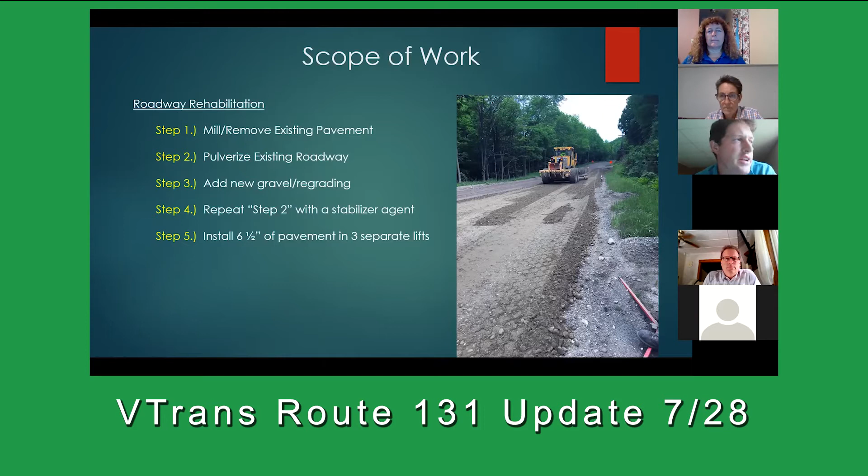Just to touch on the linear portion, the roadway work, and describe it a little better to somebody who might not know what we're doing out there. This is probably the most intrusive treatment that our paving program does. Basically we mill off a portion of the roadway. We remove part of the pavement. We pulverize it similar to a giant rototiller. And then we add a bunch of new gravel. Then we reshape it, regrade it, and repeat the process again by repulverizing it, but with a stabilizer additive. And then we add a bunch of pavement on top of that.

So it's a long process, and it usually amounts to about $1.25 million a mile to expect to invest on this kind of treatment. But this is a good thing to show what the process will be mostly next year in 2021.

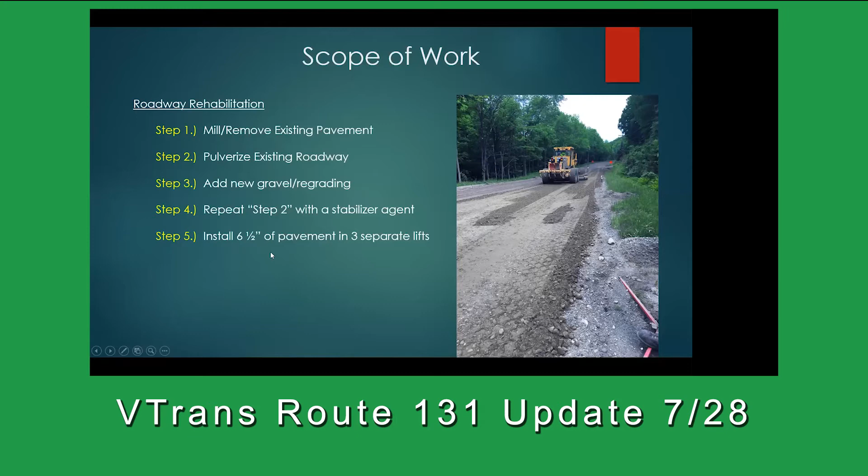But just to dive into the isolated spots that I mentioned before, this project has a precast box culvert which will be installed over by the Glimmerstone Mansion on the west side of Cavendish Village. The work there entails removing an old 4x4 by 50 box culvert and installing a much larger one, 6 foot high, 8 foot wide, 59 feet long. What was also required was some sewer relocation routing, because the existing municipal sewer was essentially resting on top of the existing 4x4 box culvert.

So when you add that new larger culvert, work had to be done to mitigate the impacts of that larger culvert. So there will be a temporary relocation routing of the sewer, and then a permanent sewer that will rest on top of the new culvert, similar to how it was before.

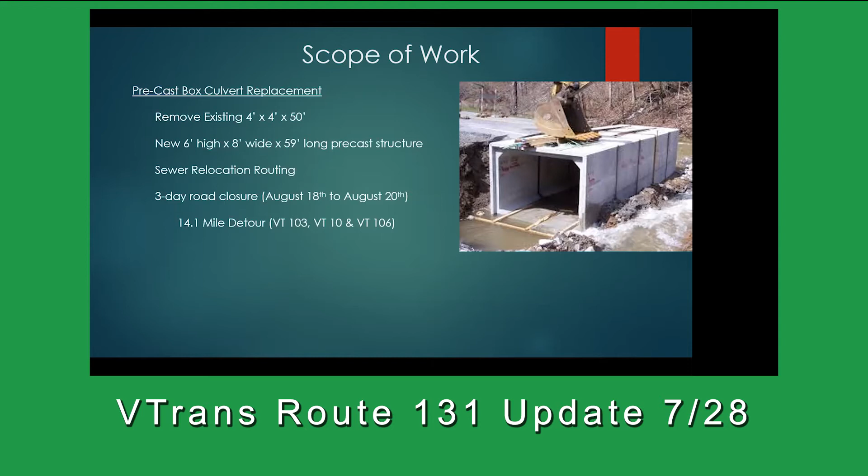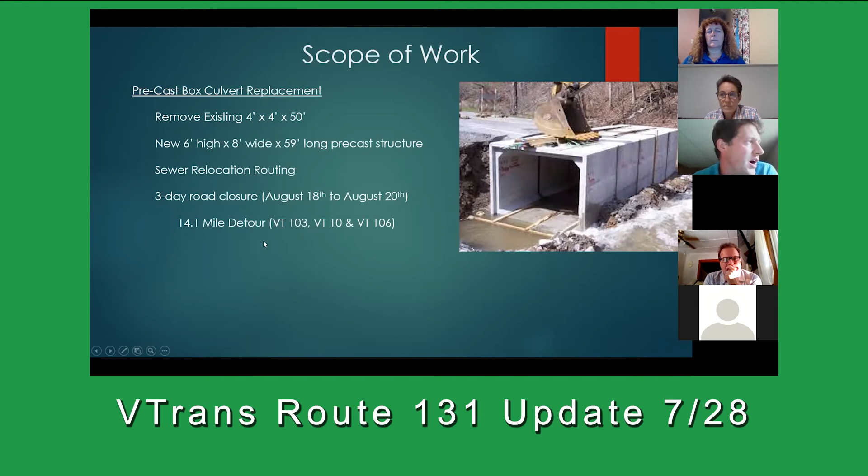And with that, there's going to be a 3-day road closure to expedite this work. Right now, it's scheduled to be from August 18th to August 20th. And this is to expedite, to get the box culvert in as fast as possible to minimize disruption to the traveling public. And the detour of this 3-day closure is listed on the fact sheet, but it's a 14.1 mile long detour on the state system. We can talk a little bit more about that later, but I just wanted to show that on this slide. I don't want to get too far into the details on the detour.

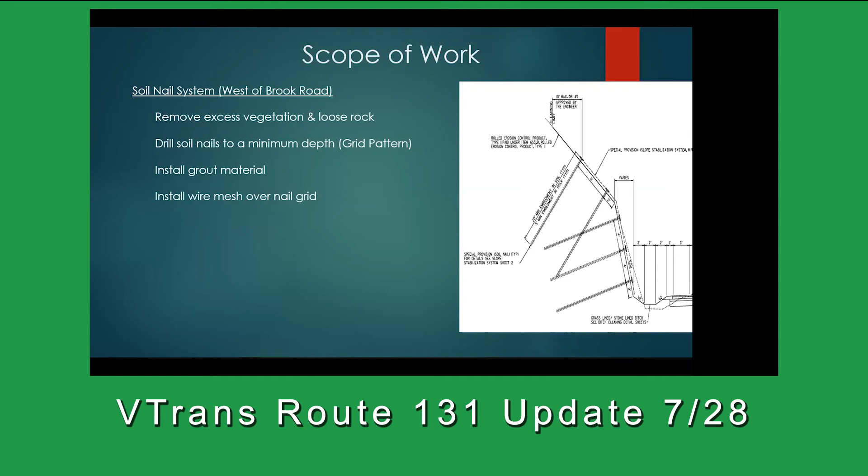And also there's a soil nail wall system just west of Brook Road. And in a nutshell, it pretty much involves cleaning up the slope face, removing vegetation, loose rock, any rock that's kind of prone to being a hindrance to the soil nail process. And then what they do is they drill a bunch of nails into the slope. I think in this case, it's showing 20 feet on that diagram that you see on your screen, but I think in actuality, we're going with 14 feet.

So this will create almost like a grid system along that 1,200 foot long section. And once the soil nails are in place, they install like a grout and then like a mesh material over the entire system. But we can field more questions about that later.

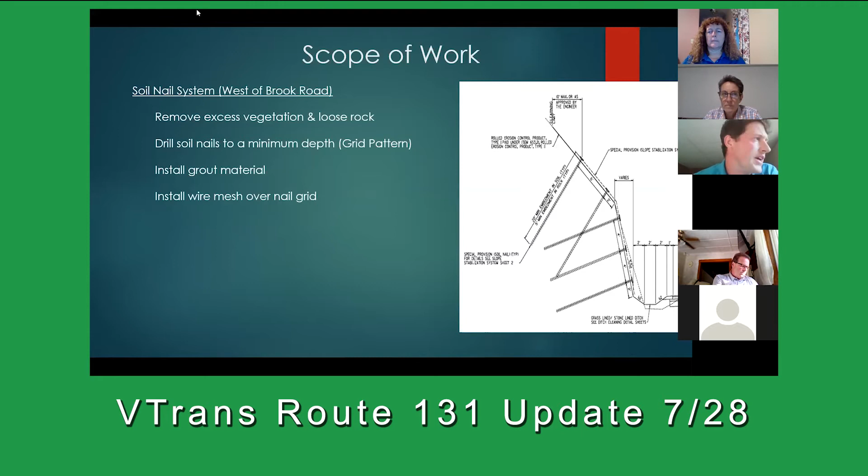And then these projects always have additional ancillary items that we also add to the project. Guardrail replacement will happen, underdrain, ditching, small culverts, sign replacement. I believe most of the sign replacement will probably happen next year when the project is finished. What you're seeing out there right now is probably some culvert work and some underdrain work. Guardrail, I think, will probably be finished up next year as well.

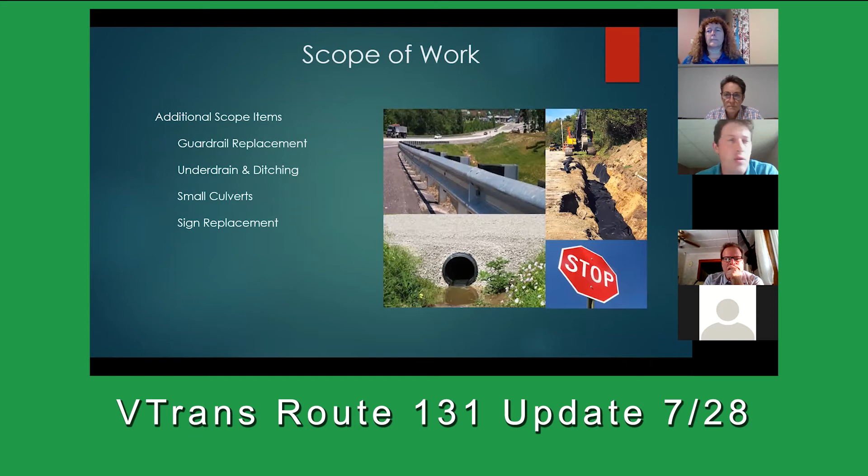And just to give everyone a general timeline for what we planned for this project, the game plan was to try and get all this larger ancillary work done in 2020. The small culverts, the one big large culvert, the soil nail wall, get everything done in 2020, which will set the stage nicely for 2021 when we start throwing around a bunch of gravel and we start doing most of the in-roadway work. So that was our game plan when we put this project together in design.

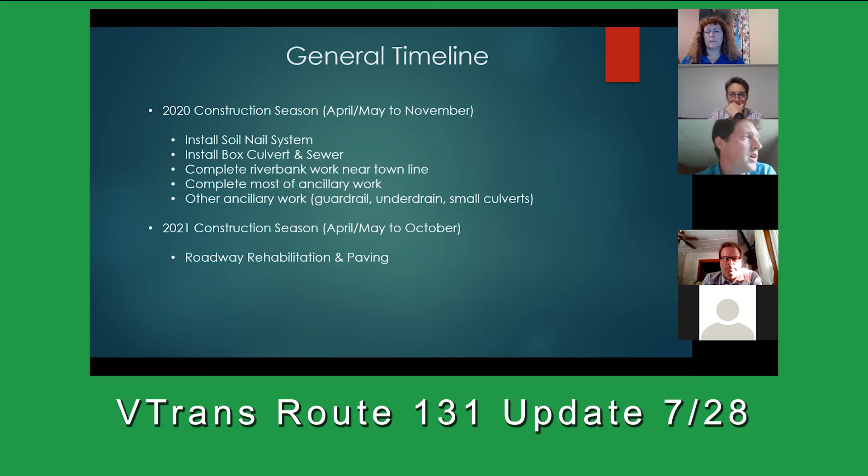But I'll let Natalie and Jason, maybe Pike, speak in terms of more of the specifics if questions are brought up about specific timelines, because sometimes construction can be a little bit dynamic. So I don't want to be the one to describe detailed things about every little thing about the schedule. So with that said, I think that's all I had. I just wanted to show those few slides to set the stage and let everybody know what this project was intended to be.

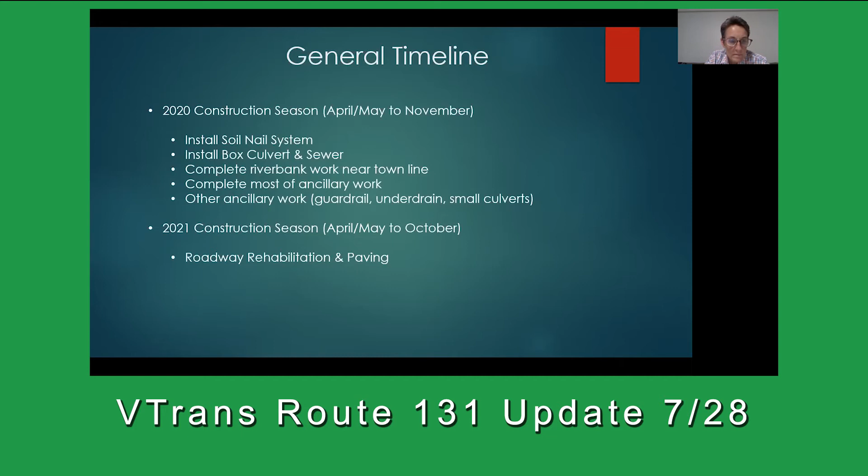Great, thanks, Brandon. Can you go ahead back over on the sidebar there and just make me the host again? I don't think I can make myself the host. I can't see how to make myself the host. Hang on a second. Or if I need to switch to shared content. I don't see how I can, whoops, cancel. Is it giving you an option to put me back on as the host? I just hit stop sharing. Okay. Yeah, it still has you as the host. If you go click on your name on the sidebar, will it give me the host back?